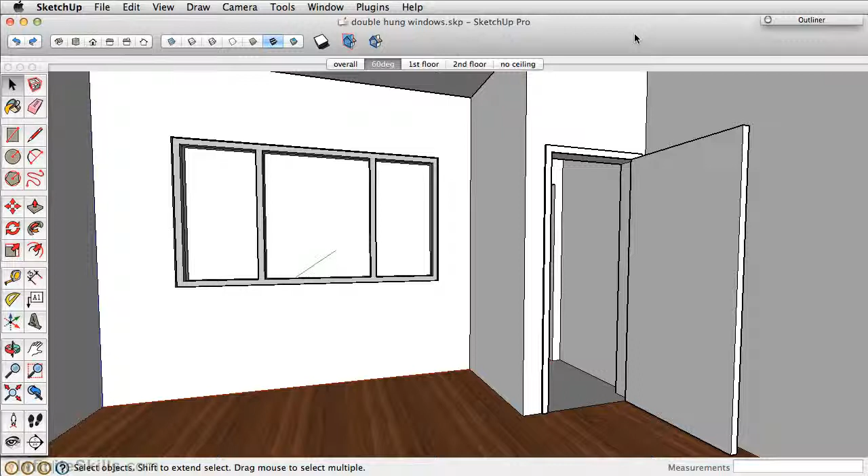Okay, let's create another window type, and that's a double hung window. Let's orbit outside and take a look at the top two windows in the master bedroom.

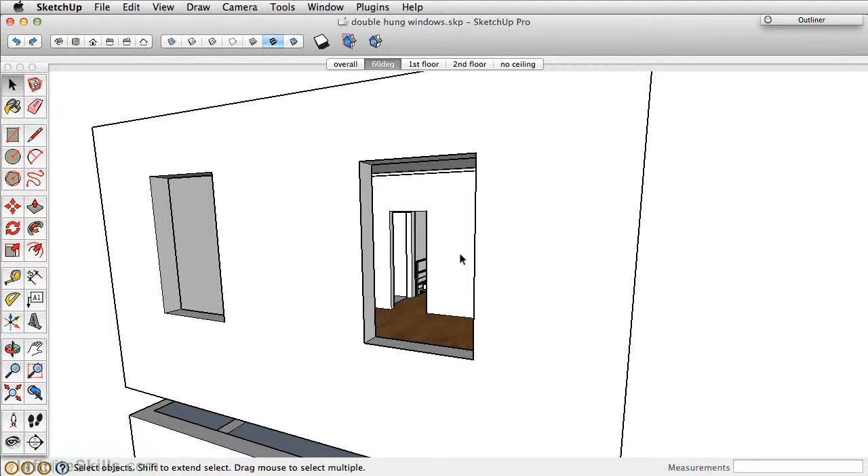To create the double hung window, we're going to draw a rectangle and then separate the rectangle in two, and then push pull the elements to create the two parts of the window that would essentially slide up and down.

Go ahead and take the rectangle tool, draw a rectangle over the front face here, and like previous ones, double click, then right click and make it a group. Let's go ahead and double click inside our group.

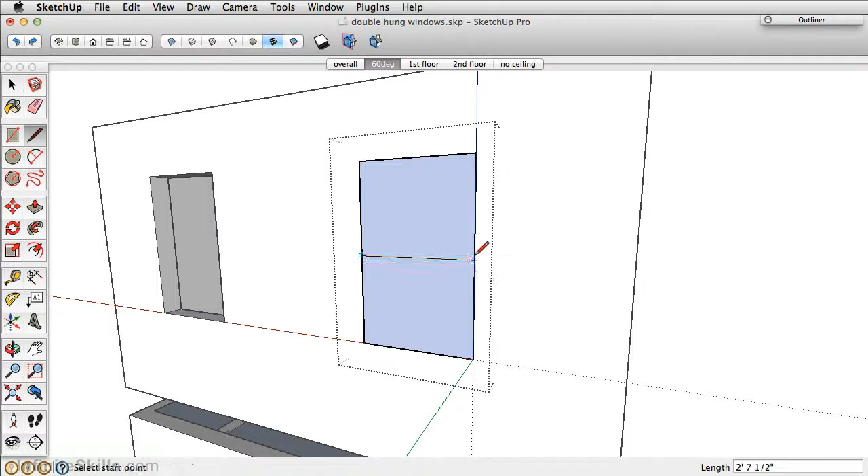Take the line tool and draw a line to break this into two separate faces. Next, offset 2 inches, and double click to offset the other element 2 inches.

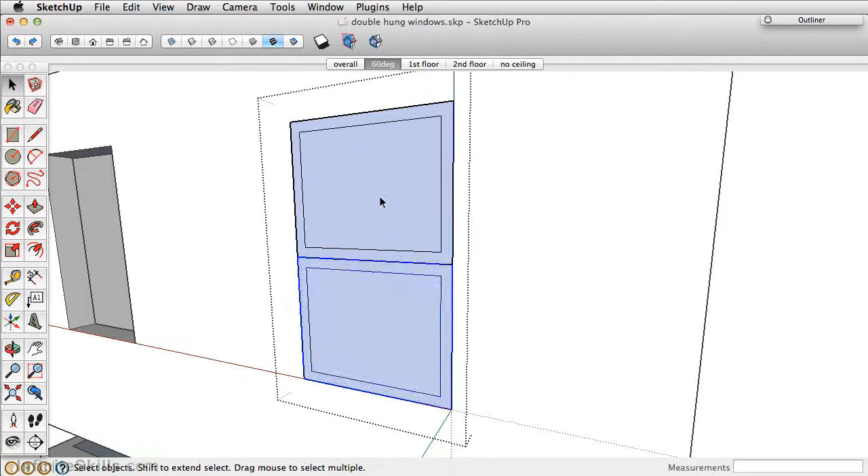Now before you extrude, we want to separate these into two separate pieces. So take the select tool, select the top element or the top window and group it, and then do the same with the bottom. Now take the select tool, double click inside the top one, and push pull this out 2 inches, and push pull the bottom one out 2 inches as well.

Take the select tool just to click outside of that. We now want to move the bottom window in front of the top window.

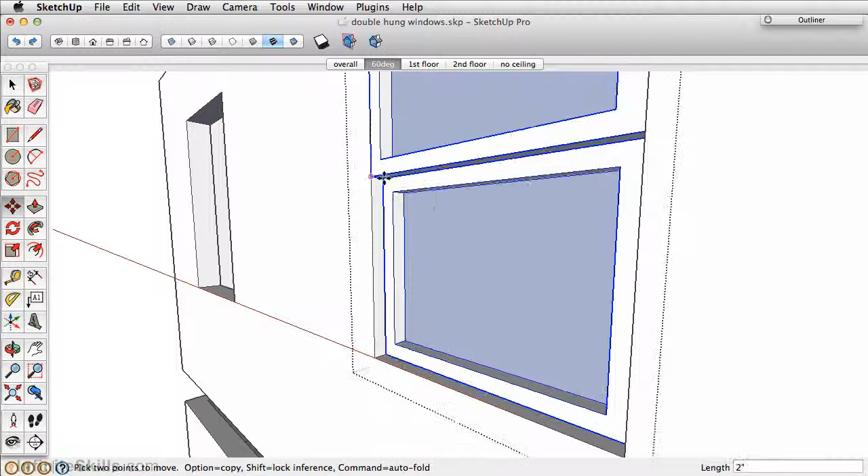Select both of them and move them inside the room. We need to move this in the green axis. Let's orbit inside. You can move this in a little bit further and move it in 1 more inch. That way it's an inch on this side, and it looks like it's 3 inches on that side, and an inch on the top here.

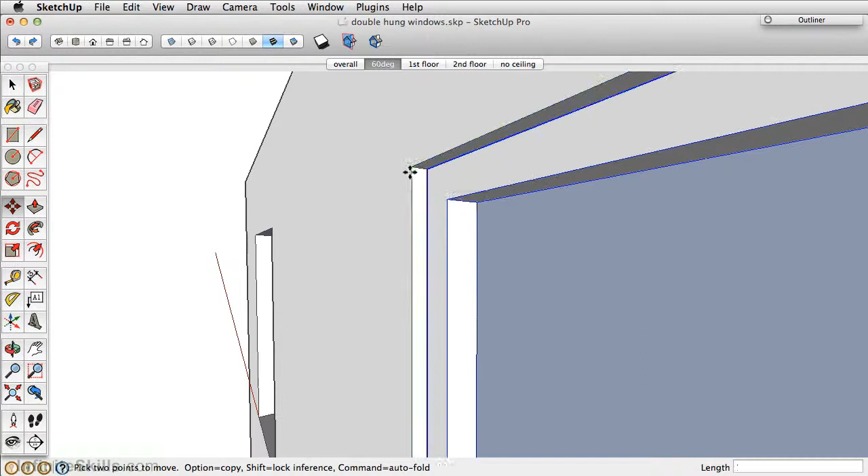All right, the next thing that we can do is double click inside our group, and let's push pull this face back, not all the way to 2 inches. We just want to push this back 1 inch, and the same for the top.

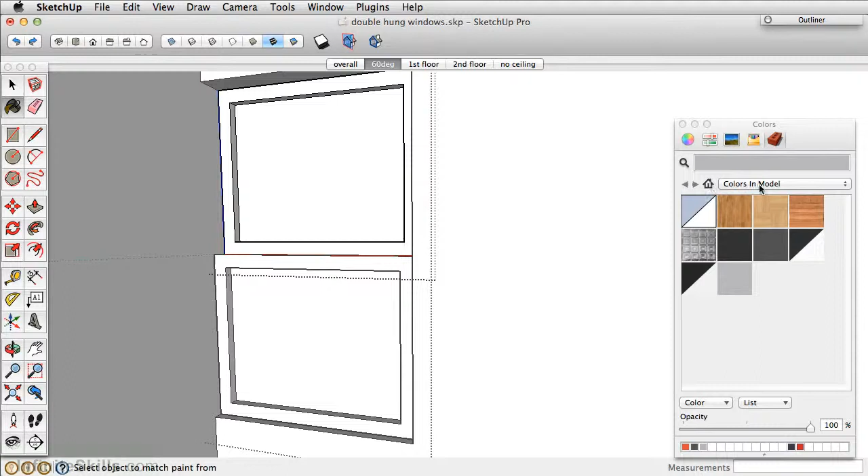Take the paint bucket, click on the brick or the materials in the model, and we want to select the translucent one that we used downstairs and apply it on both faces here. Also take the silver and apply it to both elements there as well.

Now, since this window is the same as this window, we want to right click and make this a component. And then we want to move copy it.

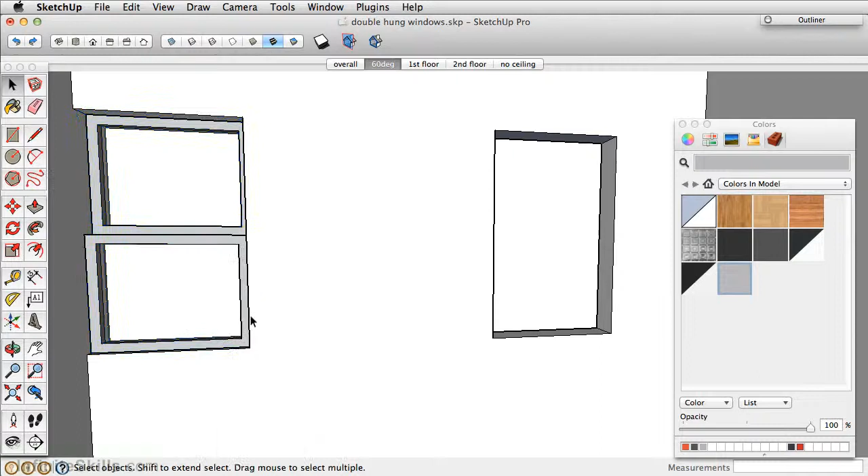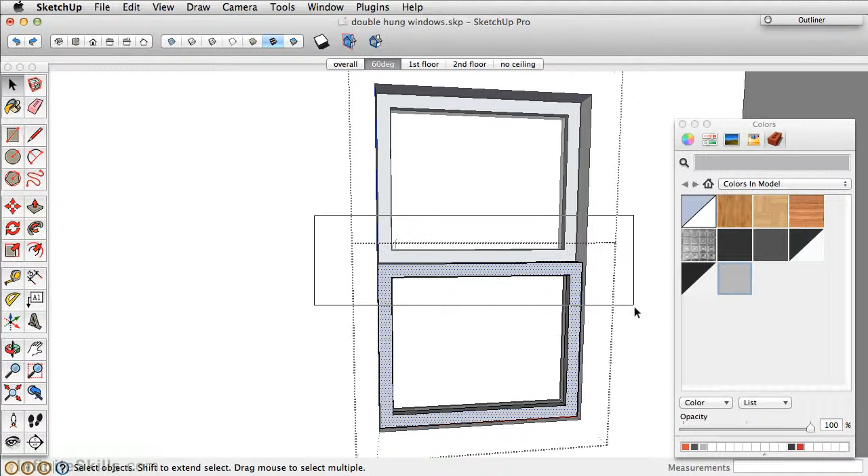The last thing we notice is that the top face here should actually be up further. So double click again to enter this face. Select a selecting window from left to right around that top area, and that way it only selects the elements in that top area there. Take the move tool and just move this up, making sure you're in the blue axes.

Can't find the blue axes? Remember, you can press the up arrow key to lock in the blue axes. And we just want to infer it to the top point right there. If you're having a hard time finding that point, you can always click on the X-ray mode, and that'll allow you to see through the model.

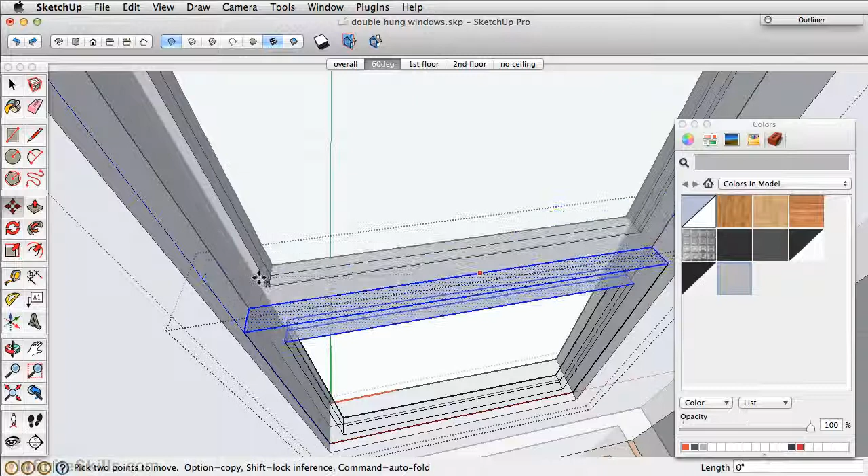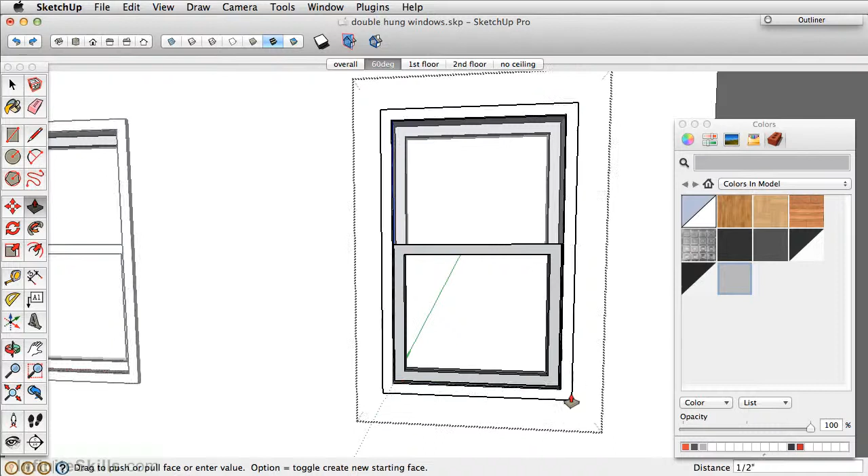If you want to add trim, you can actually draw a rectangle around that front face. Offset this 2 inches and just delete the front face and push pull your front out 1/2 inch. So now you have the trim and the window. I can click out.

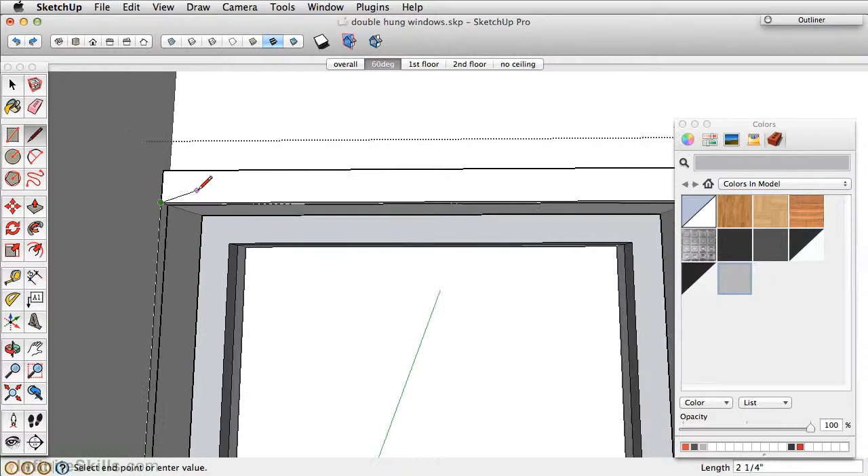In this case now, this window actually ends right up against the wall here. So we can make this unique by right clicking. Hide the rest of the model, or find our lines for where to draw these. And then simply just take the push pull.

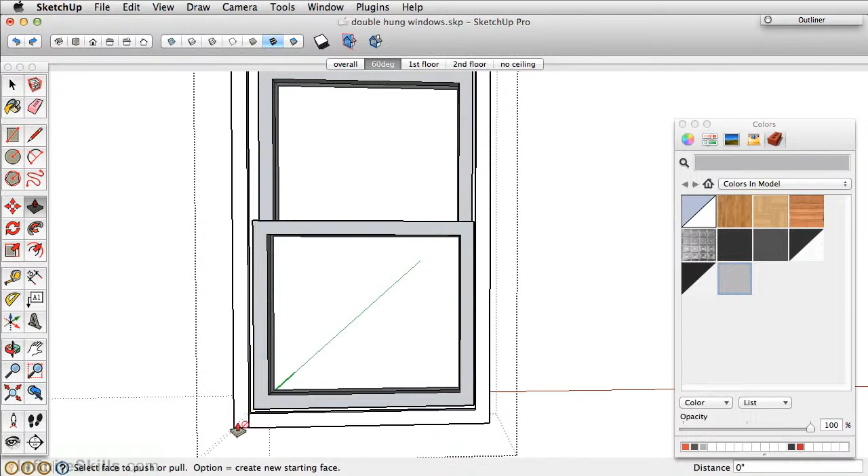This is actually a good error. Whenever you're nesting groups, make sure when you're drawing that geometry that you're drawing it inside the actual group. See how I drew this on the outside? When I go to push pull, I can't, because you can't push pull the outside of a group. So delete those two lines and make sure you're inside the trim here.

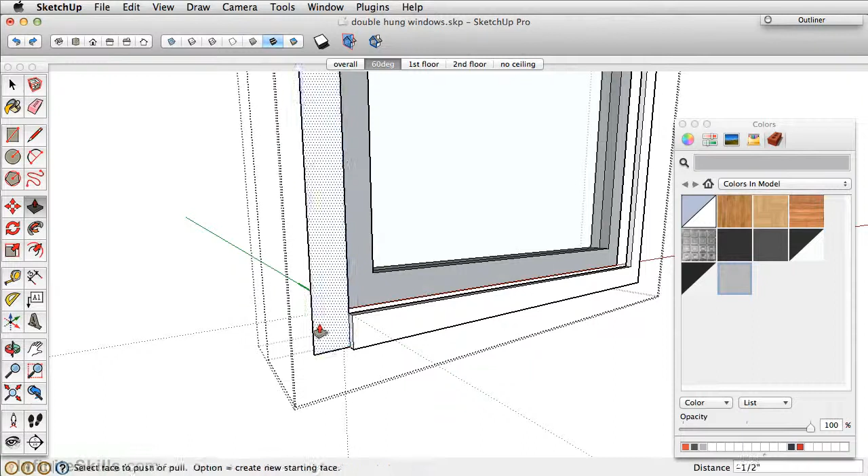Now you can go ahead and draw your line. And draw your line. Sometimes it's nice to make mistakes—you can learn from them. And then just erase those edges. Erase this edge here, and erase that edge there.

So that's the basics of creating windows. Next, I'm going to show you a plugin for SketchUp called 1001 Bit Tools, which allows us to quickly auto-generate windows and doors and some other elements based off of values that we input into the model.